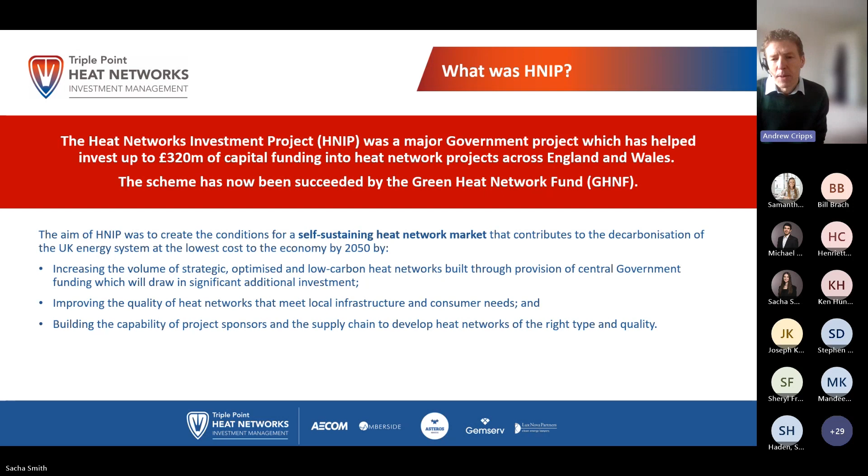This is a particularly important piece, because the rate at which we need the heat network sector to grow is significant if it's going to meet the aims we have in overall policy terms. So getting this growth in the quantity and quality of the people in the supply chain is really important, and I think we've done quite a lot in that respect, as well, as we're going to hear today.

It's quite an interesting thing that there's been a significant rate of change in the policy sector. In fact, the early aspirations were as much about growing heat networks of any type, but as the scheme has developed, it's been clear that we needed to decarbonize more quickly, and we've seen a move away from some of the early schemes that had greater use of gas CHP towards a lot more use of heat pumps.

And energy from waste. Notwithstanding that, we've invested something around 270 million in this set of heat networks, and those are contributing to a total investment of around 700 million, exceeding 700 million into those heat networks. So really quite a significant collection of projects which are coming forward of good scale.

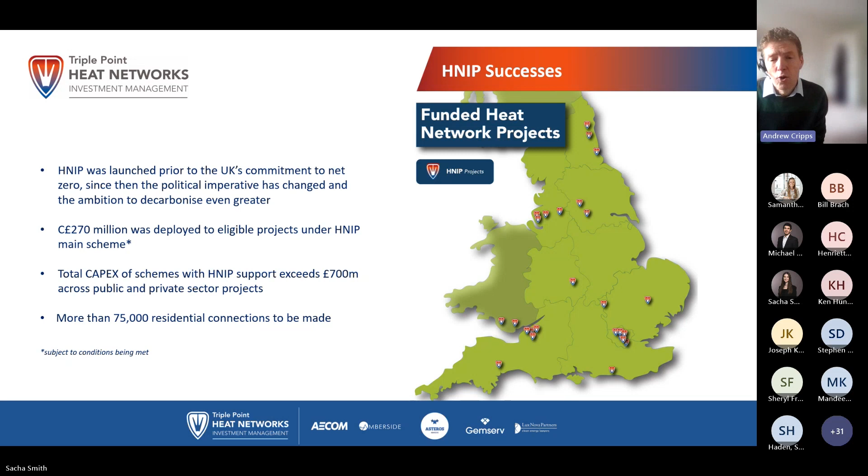Amongst other connections, that means that when this is built out, we could see as many as 75,000 residential customers being served by these heat networks. So that's the scale of what's been done already, or is being done already.

The first is Beehive. The purpose of Beehive is to be a place at which potential customers for heat networks can put forward their request for support, particularly local public sector customers can put forward their request, what it is that they want for support, and then potential funders or suppliers of a whole range of services can get together with them there.

So if you haven't come across that before, the acronym there was BEIS, because that was the department at the time, Business, Energy and Industrial Strategy, Heat Investment Vehicle. So the idea was to bring together, and still is, to bring together projects with investors to bring them forward most effectively. So if that's of interest, please investigate that. Easy to find on the internet.

The second and third ones here are both areas where it was felt, coming into the programme, that there's so much similarity between projects that it makes sense, as far as possible, if the documentation used in them can be made more common. We can save costs developing bespoke documentation for particular situations where other people will already have something similar.

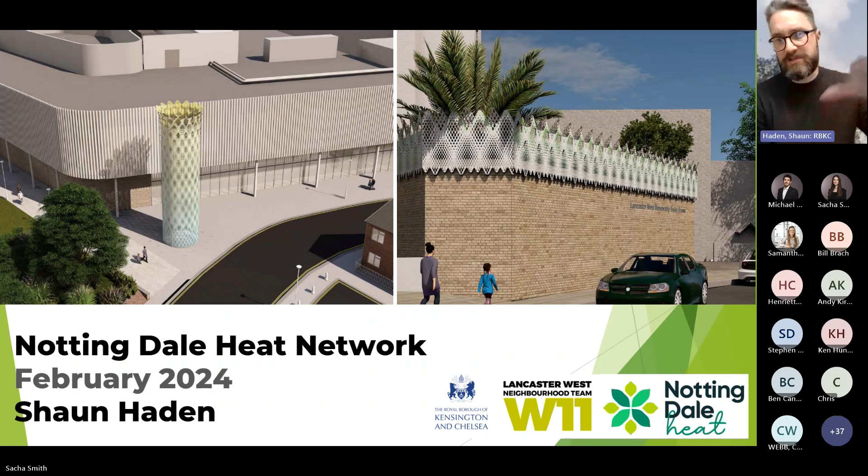So my name's Shaun Haden. I'm Head of Strategic Programmes and Innovation at Lancaster West, which is part of RBKC. Here today to talk to you about the Notting Dale Heat Network, which is a heat network on the Lancaster West estate, which is the estate which surrounds Grenfell Tower.

As you're probably aware, there's been a big focus on the Lancaster West estate and Grenfell Tower following the tragedy that happened a few years back. There's a big government commitment to turn the estate into a model for the 21st century. And our vision for the estate is fourfold.

We want to be that model for the 21st century housing estate. We want the estate to be carbon neutral by 2030. There's a big co-design and co-delivery aspect to everything that we do on the estate, and Lancaster West sits in the broader Notting Dale ward, which has achieved eco-neighbourhood status from the GLA. So we want to turn Notting Dale into the UK's largest eco-neighbourhood and put that green recovery at the heart of Grenfell recovery. So that's our vision.

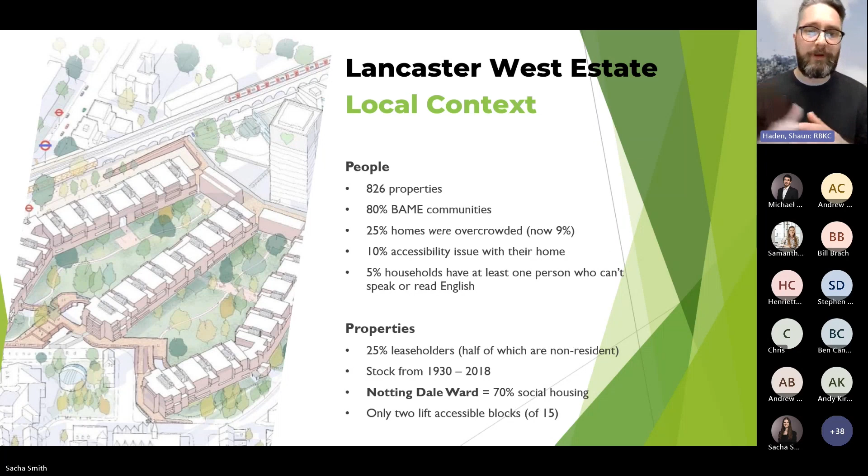Little bit about Lancaster West. It's a really small estate, 826 homes, hyper diverse, with a good range of tenures on the estate - leasehold and tenants. There's some commercial assets on the estate as well. There's a range of stock on the estate too, ranging from 1930s Victorian homes all the way up to modern 2018 new blocks.

As I said, there's a big government commitment to turn the estate into a model for 21st century estates, with a big programme of works taking place on the estate. The aim is to turn the estate into zero carbon, as I said. There's four aspects to our programme.

One is this concept of a deep retrofit, refurbishing all of the homes on the estate internally to a really modern standard. Landscaping and public realm is a big thing which has emerged, turning the landscape and the estate itself into somewhere which is pleasant to be around - turning it into a garden estate. And the other key aspect which we're talking about today is the Notting Dale Heat Network, which is a major plank of the programme.

So Notting Dale Heat Network is basically trying to turn two end-of-life gas communal heating systems into one single renewable heat network. We've got four key aims. One is to turn it into a reliable heat network. One is to deliver really excellent customer experience. One is to protect customers from rising energy prices and embed fuel poverty work within it. And the other is to support the council's ambition to be carbon neutral by 2030. So those are the four things we're trying to achieve via the Notting Dale Heat Network.

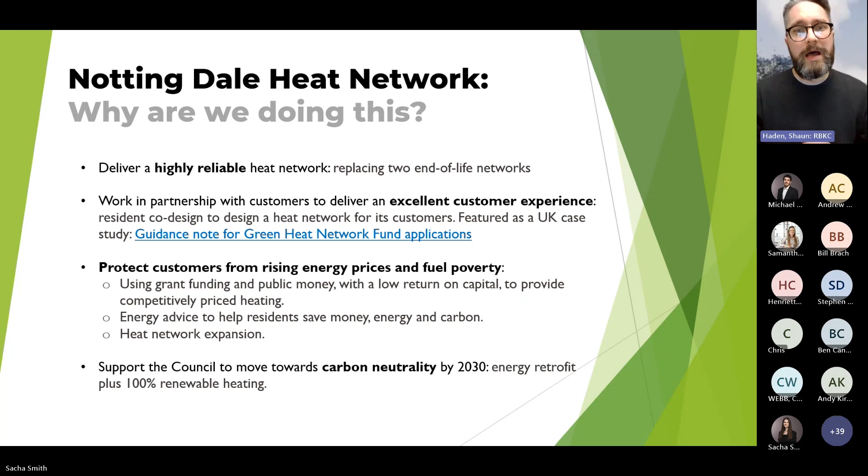As I mentioned, phase one of the heat network is on the Lancaster West estate, 826 homes. 75% of those are tenants, 25% are leaseholders. RBKC is the main freeholder, which makes this project really much easier to do, I would say. 80% of the estate are on communal heating - those two gas-fired communal heating systems.

One communal heating system is literally on the roadside - it was underneath the tower when the tragedy happened, and that's been moved to next to the roadside. So we've got a temporary kit which we are going to roll up into one heat network, and another end-of-life system as well. 20% of the estate are on individual gas combi boilers, so one of the challenges we're going to face is to bring those 20% into one communal heating system and try and sell that to customers.

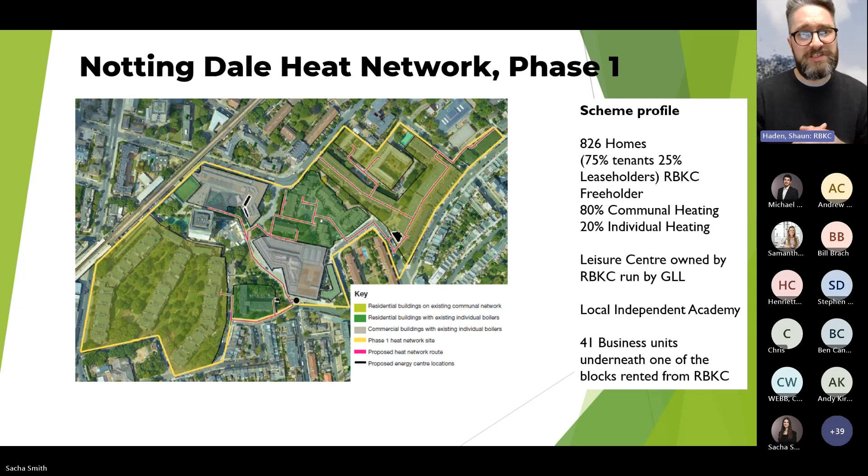The scheme also includes a leisure centre, which is owned by RBKC, and a local independent academy. There's also 41 business units as well, which are part of the scheme, which sit underneath one of the blocks. I've included this slide.

HNDU have been really supportive. The grant we received from them unlocked the support we needed to get the right kind of people involved in the project - an experienced project team, project management function, and experienced stakeholder engagement people who've done this kind of thing before, which is really key for us. We were a local housing team, housing professionals, so heat networks were really not our thing. Bringing on board a team of consultants to help us move the project forward at pace with the right knowledge has been really helpful, and HNDU and HNIP have enabled us to do that.

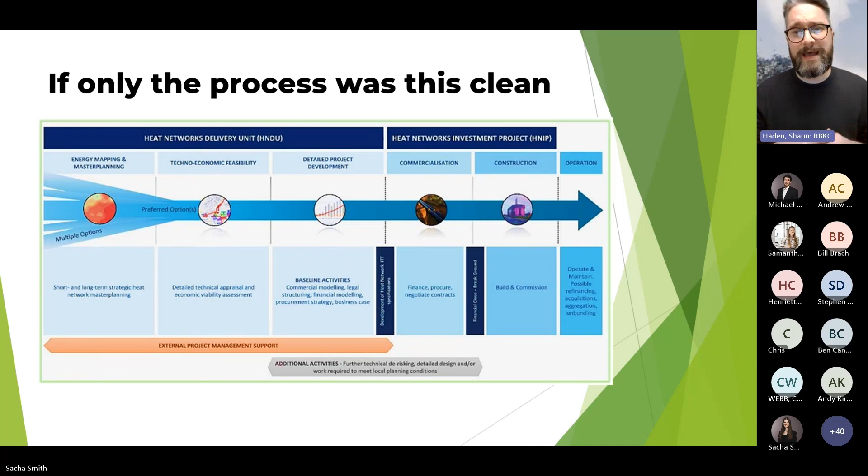Alongside that diagram around the programmatic aspect of moving the project from master planning to operation phase, we've run this co-design aspect throughout that process as well. As I mentioned earlier, co-design and co-delivery is really crucial and key to what we're doing on the estate here.

As you can imagine, there's a deficit of trust and a deficit of engagement with the council from local residents. So one of the key things we've been doing is working door to door with residents on a regular basis, talking to them about what they want this network to look like and what they want from the wider refurbishment of the estate. What you can see there is a timeline of that activity and some measurables from the work we've done.

This is really crucial for us, because where we are, consent is everything. If we don't get consent to act and deliver on the heat network, it's impossible for us to do anything on this estate. That's something really central to what we've done here at Lancaster West.

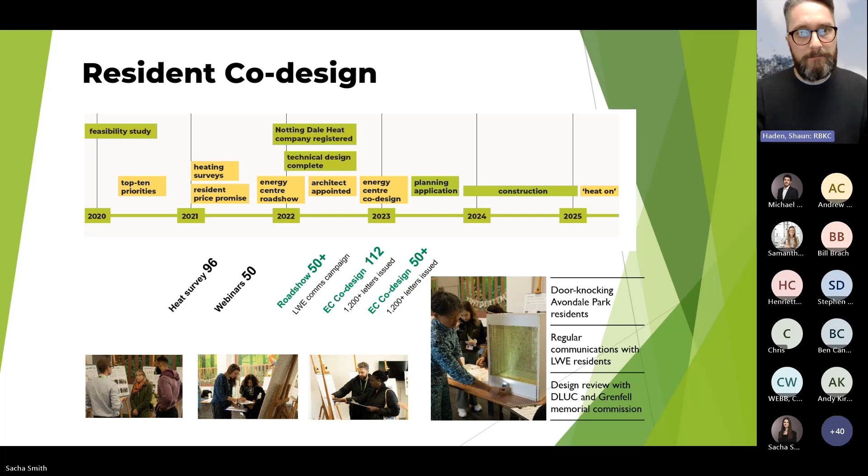Next slide, please. A little bit about the tech. I'm not a technical person, but I've become more and more understanding of the technical aspects as time has gone on. It's effectively run by air source heat pumps and a water source heat pump, situated on the roof of the leisure centre, which is going to be part of the scheme.

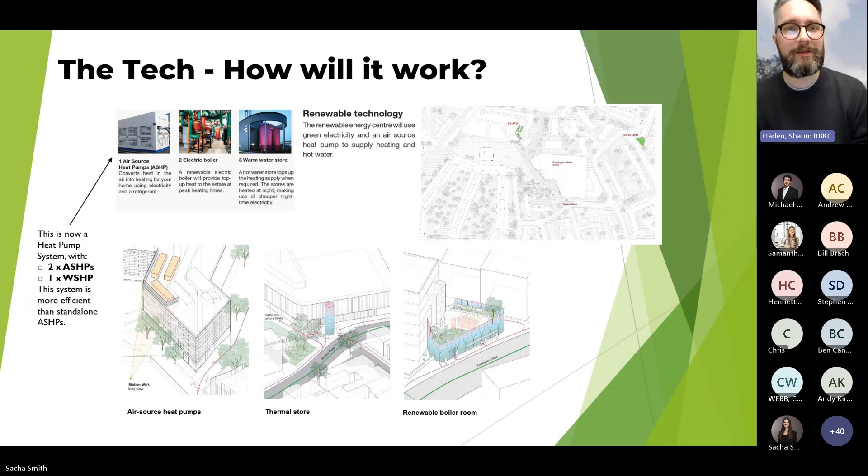We're looking at developing a thermal store, positioned, hopefully subject to planning, outside the leisure centre. There's also going to be a renewable boiler room, repurposing an existing boiler room that currently supports half of the estate. The aim is for it to be completely renewable technology, using green electric to power the kit.

Here's just some images of the energy tree, as we're calling it, subject to planning permission. This is the water store which is positioned at the moment outside the leisure centre.

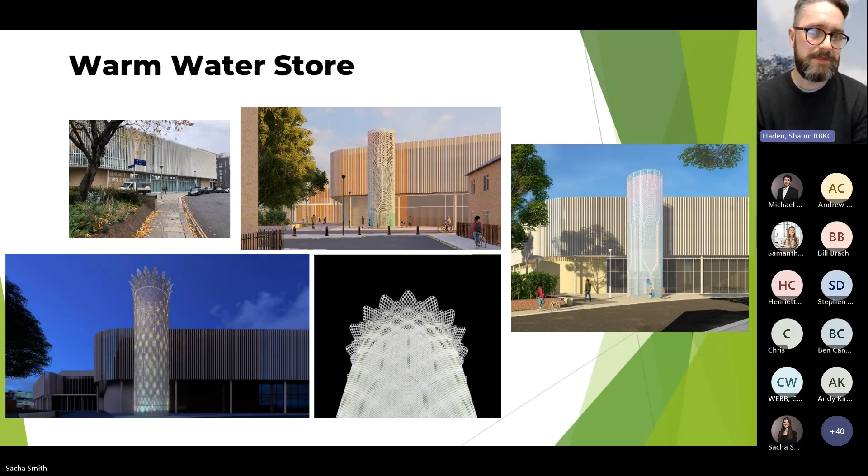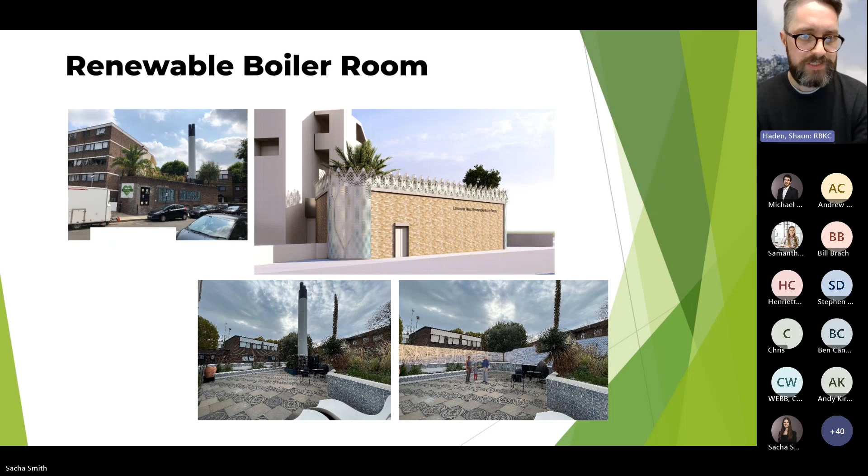As I said, subject to planning permission, which is going through at the moment. So some more images of potentially what the boiler room may look like. What you see there is a Moroccan garden in the bottom two images, and the removal of the stack which is currently there, supporting a gas-fired communal heating system.

We've recently signed contracts with two contractors, Vital Energy and Synergist. The scheme is divided into two really. We've got a DBOM contract, which is design, build, operate, and maintain the primary network, which runs around the estate. The second contract is the design and build of the secondary and tertiary networks inside the residential homes. We're just about to go on site. We've had contractors with us now for a couple of months, and we've signed those agreements, and we are literally breaking ground in the next couple of months.

One of the key features of the conditions of the HNIP grant we received was that we should set up a local energy company to run the network. We've done that. That's been a really interesting process to go through, not least in our own context. The entity is called Notting Dale Heat. It's 100% council owned, overseen by a shareholder committee. There's a board of 6: 2 residents, 2 independents, and 2 council officers. It will have its own independent professional management, and it's got its own business plan. At the moment that entity is in its early beginnings, but the aim is for it to operate and maintain the network.

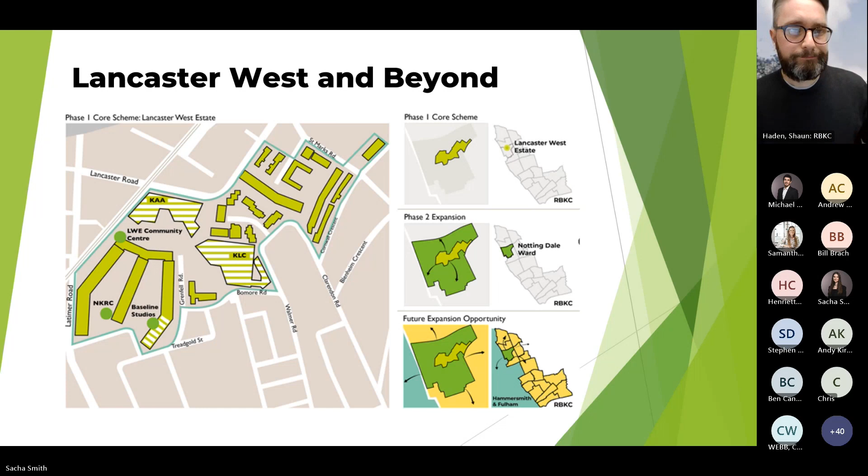As someone who's not a techie, I probably won't talk about technical success or challenges. Some of the things we've been really successful at is building a winning team. We've been in really good hands with the consultants we've employed, with HNDU support, and with HNIP as well. That's been useful for harnessing government grant, building momentum, and triangulating lessons learned - learning from others what's worked well in the wider sector, what hasn't, where others have failed or succeeded. We've tried to learn from those examples. The resident co-design, as I mentioned, has been really key throughout this project.

Navigation of the politics has been a success from my perspective, but also a very big challenge. One thing we've done is see these projects as more than just an infrastructure project - rather than just pipe work, it's about who are the customers at the end, who are the residents, who are the people that will actually use the system and pay the bills. Another thing is just questioning everything. I think we've got a team with a good balance of heat network experience, but also people like myself who don't come from that background, so challenging what we're being told and what's been accepted - that's really helped us.

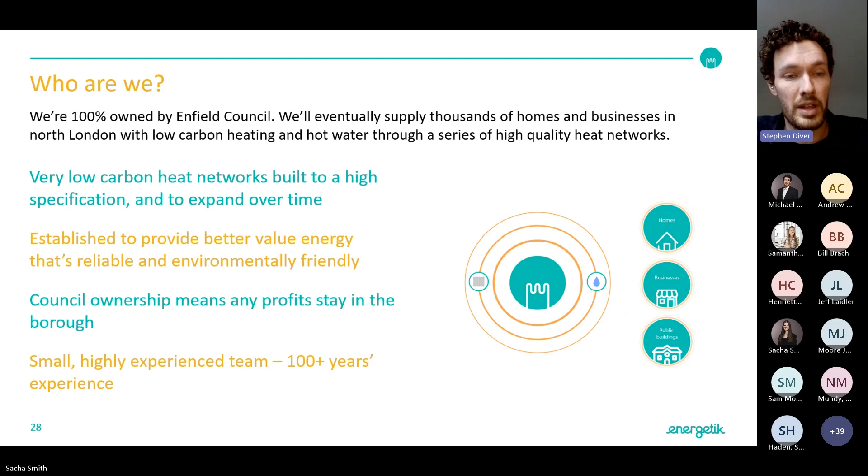So, as I mentioned, we're fully owned by Enfield Council, but we operate in a private limited company capacity with a series of executive and non-executive directors on our board from industry. We put our customer in the middle, and Energetik is in the middle of the delivery of that service. All the major contracts come into us: our design and build contract, our heat offtake agreement with the Waste Authority, customer services, etc. We make direct agreements with developers for connection and supply.

But Enfield is our main funder, so they are the borrower for HNIP in this case, and they on-lend to us. Subsidy control, state aid compliance considered, of course.

When we started this business, it was a very different market 10 years ago. But we very much thought, you've got one bite of the cherry, so everything was designed with expansion and big carbon savings in mind, with a view that heat networks were going to grow into something quite significant in the future as a way of decarbonising. So we made sure that all our energy centres have got plenty of extra capacity, and our pipework was oversized to make sure we could supply and connect to buildings in the future. Obviously, with zoning coming down the line, that's quite pertinent.

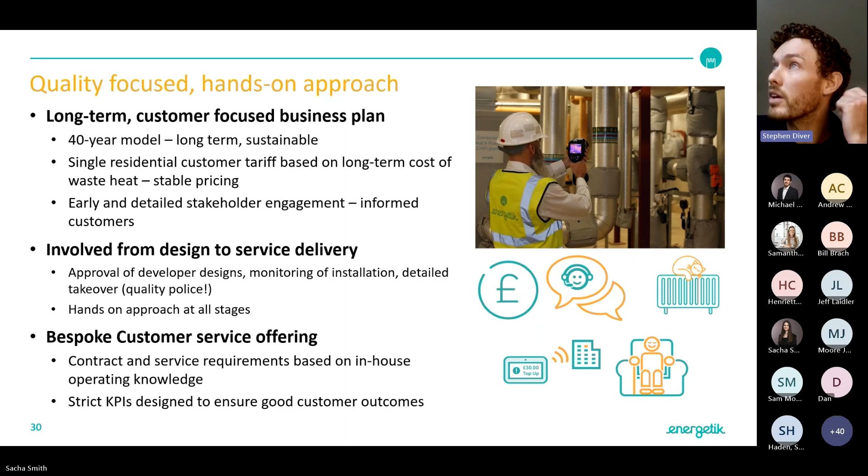So here's a brief timeline. Things take a long time. We were incorporated in 2015. Took 2 years of going back and forth, due diligence, green book, various things, but we got initial investment in 2017 to unlock the first part of the business plan, with HNIP funding coming in 2019 to unlock the rest. So we got started in 2017.

The rest was to build out our strategic scale network. And then in 2021, we got further funding for another 49 million to embark upon a fairly ambitious expansion project to connect a series of other development opportunities.

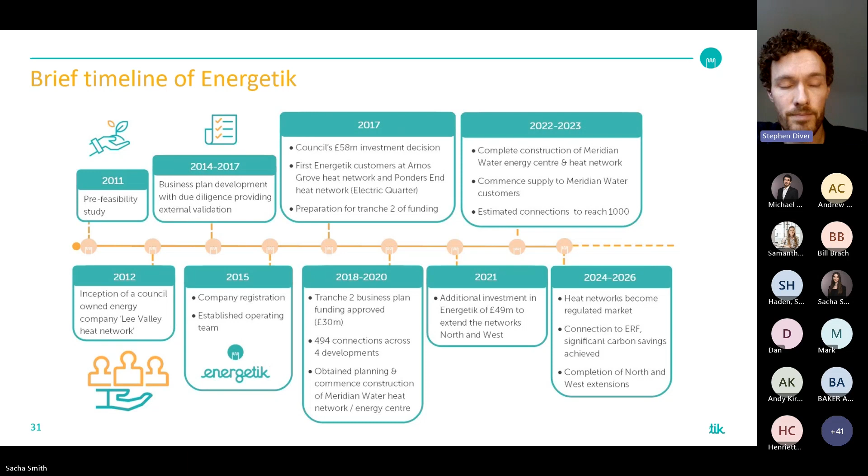So this is a bit of a brief map of Enfield. We've got 4 networks, although there's 5 pins on this map, serving 5 developments. All are operational. Meridian Water in the southeastern corner is the strategic scale network, and we've got varying from a couple of hundred to about 1,000 customers in total. But these networks are designed to build and expand as developments are built out, so we can supply potentially 60 to 100,000 customers eventually with what we're putting in at the moment.

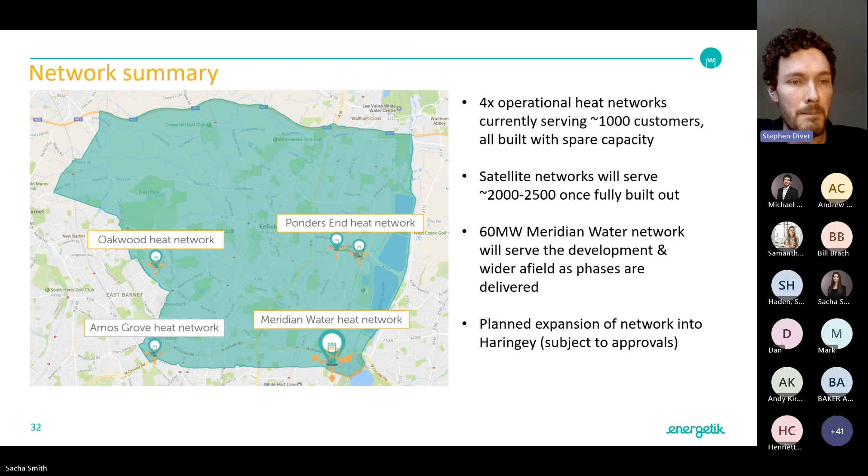So HNIP funding, as I mentioned, was one of the keys to unlocking our business plan. We've received, I calculated, probably about 15% of the HNIP pot that was distributed. But it's a massive network, so we had a massive amount of funding from HNIP, which, in terms of key wins, this project wouldn't have been as big and as aspirational if it wasn't for HNIP. That unlocked us to build our energy centre and install the first kind of 6 kilometres of pipework for phase 1, as well as doing some small scale extensions to our satellite networks.

Just onto the next slide, please, and I'll show you what we've built. So this is the Meridian Water Energy Centre. This is the strategic scale network that Andrew was talking about at the beginning, with massive capacity of thermal storage. For those techies out there, there's about 1,400 cubic meters in there, enough to take a massive amount of waste heat from the North London Waste Authority and use it as our batteries to then pipe out to networks.

Now, I say up to 100,000 homes in terms of who can be connected. My technical director comes up with a different number each time, but the number is essentially limitless. Obviously, you can provide base load or peak load, so we're putting in pipes that can carry kind of 30,000 customers worth of heat per leg at peak demand. So pretty high capacity network. The first homes at Meridian Water, all 20 of them, came online in September 23, but that will be built out to kind of build up to about 10,000 homes over time. But as I say, we've got massive capacity in the network.

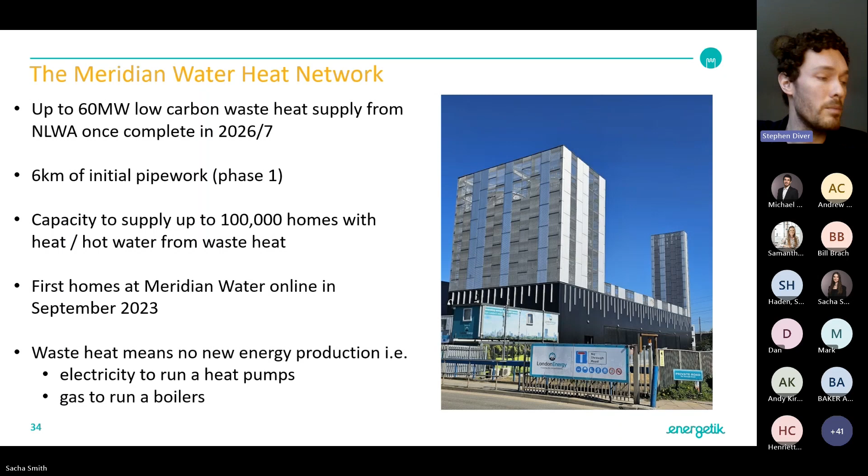So next slide, please. We then applied again in kind of 2020, 2021, where a series of large-scale developments came forward through planning, and it essentially provided the catalyst for us to apply to Enfield for more funding, which in turn we went to HNIP with the council and supported them to secure further funding to do this work. And that was essentially extension pipe work, extending across the borough basically to interconnect networks and lay the foundations for future decarbonisation of Enfield.

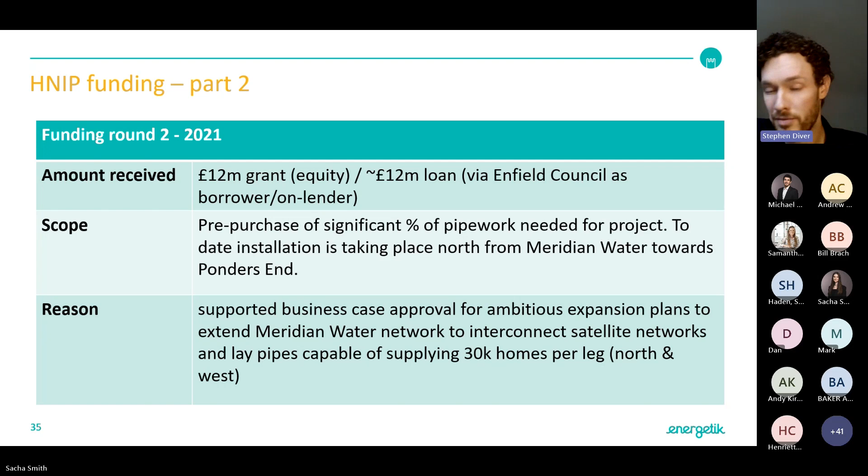That looks like the map on the next slide. Here's a slightly ugly map of Enfield, but you've got the Meridian Water Energy Centre and the Meridian Water development in the southeast corner. We're currently building all that blue pipe work at Meridian Water, as is the network at the Energy Centre. We're extending up towards Edmonton Green, that cyan line, and separately at the same time up towards Ponders End Heat Network, which should be completed at some point this year.

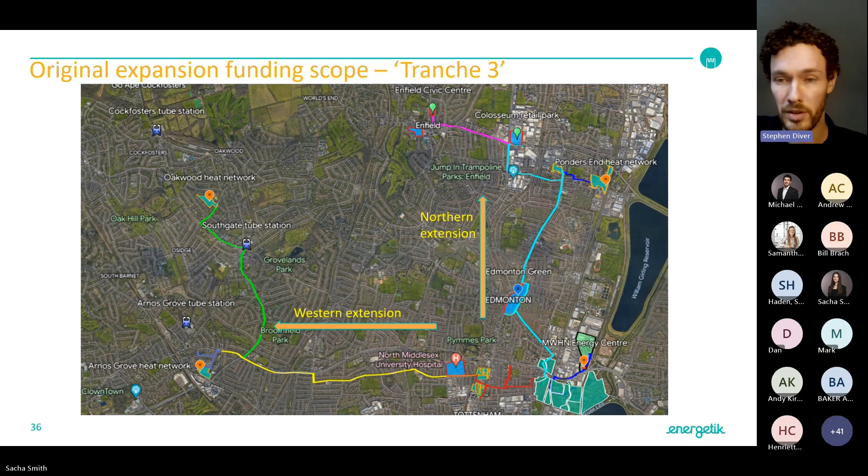It's not easy to dig through very busy North London roads, so one of the lessons learned is lots and lots of stakeholder engagement along the routes. Things go wrong, pipes burst, electrics get shot, not by us always, but being very engaged with transport and highways and making sure that everyone's fully briefed on what's going on is really important. And then the western extension was to connect to our other heat network satellite schemes and pick up a number of different opportunities along the way.

Now, getting to the important part of the presentation, we've had unprecedented issues over the last number of years, which everybody's been exposed to, inflation being one of them. Our project was originally going to be 49 million, as I mentioned, and we were kind of pre-purchasing a lot of stuff.

A key win there was we bought about 90% of the pipe for this extension project. There was a 30% cost increase the day after, so that was a massive win. But a 49 million pound project with 2 years of gross inflation and massive labour and materials increases has made that project, as previously shown, a 76 million pound project, which is untenable really.

Just to give you an example, £3,500–4,000 per metre of trench dug to deliver these pipes, and we're talking about metre and a half trenches, has gone from £3,500–4,000 pounds to £6,500–7,000 pounds.

So we're truncating the network somewhat at this present moment, reprofiling some of the spend to bring it back within budget so we can still deliver, and potentially reprofile the funding to go in a different direction, potentially south down into Haringey. There's another HNIP fund approval that Haringey received to connect to Energetik, so aspirational to get beyond Enfield, and we've got massive amounts of heat in Enfield. We are working through that with HNIP at the moment.

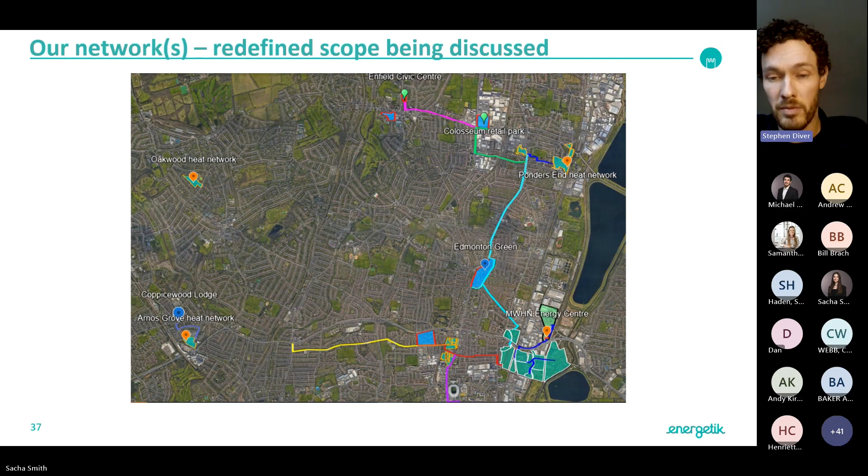Key wins and key successes: HNIP have been great and have supported us through it, and recognise that these issues happen in the market, and are helping us cut our cloth accordingly. HNIP has been a key success — we probably wouldn't be to the same scope and extent of a network without them. The lines on the page I previously showed probably wouldn't have happened without HNIP funding and the grants we received, meaning we could deliver a much bigger project to decarbonise Enfield.

One of the big successes was that we carved up the extension into different project lots to try and develop competition in the market. There aren't that many businesses with a balance sheet that can take on £50 million worth of project, so we carved it into smaller chunks, which brought new tenderers to market. Some have been better than others, but some are really, really good.

As I mentioned previously, procurement of all the materials was a bit of a boon. I'm sure I don't know what that price would have been if we'd been buying pipes as we went.

Just some of the lessons — working with HNIP has been great. Those guys are really supportive and have been there every step of the way for us, working with us. It's very difficult, we couldn't have forecast a global pandemic, wars in the east of Europe, etc.

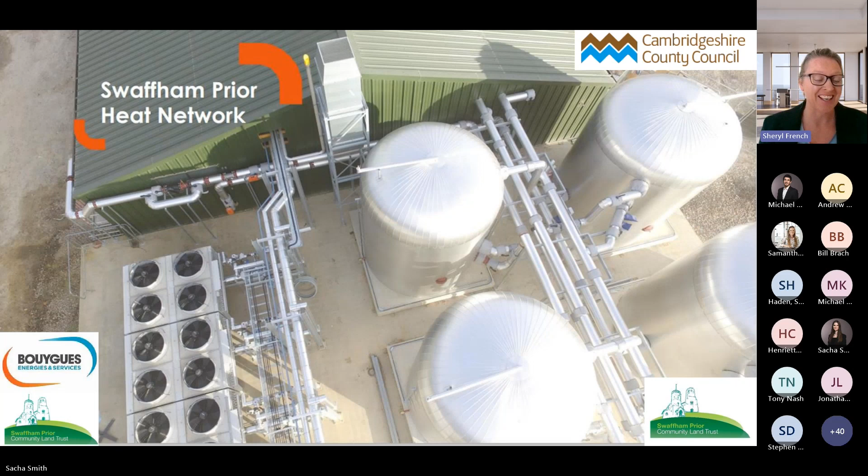This is a rural village. It's a mixture and combination of historic buildings, a high street of medieval times, and then a whole range of homes from manor houses down to very small social housing. So it covers everything. It's also on a slope, and the local people have large amounts of social capital.

They've done a lot of things in their village and they've achieved a lot. They've brought social housing into the village to support families staying there because house prices are so high. The positive thing is when they coalesce around an issue, they drive it very hard. Obviously, the other side is that when they're unhappy about something, they can also coalesce and challenge very hard as well.

So I'm just going to take you to the next slide. We had roughly 300 homes, 2 churches, a school, a pub in the village, and Cambridgeshire County Council has a large rural estate, with land just on the edge of the village. What the local people had identified was that there was a barn on the village edge which could be used if a community energy scheme was brought forward.

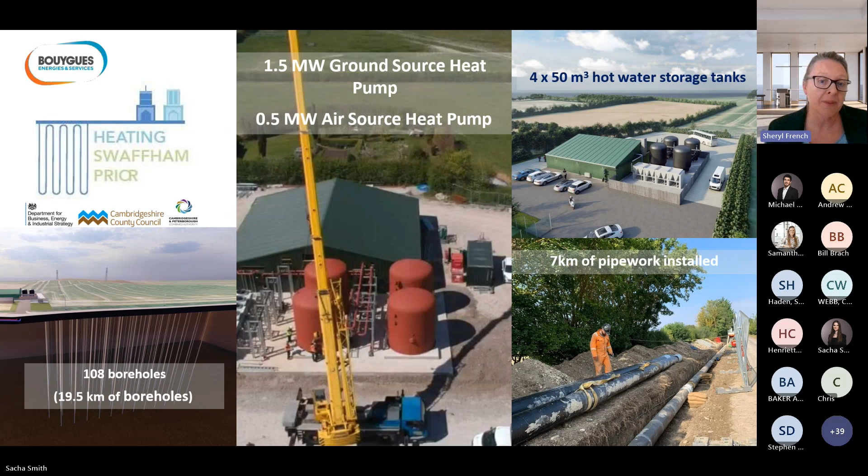So this was the proposal as an infographic. We had a ground source heat pump and an air source heat pump.

One of the reasons for changing initially from just a ground source heat pump scheme to one with a high temperature air source heat pump was two reasons. One, not to freeze the ground, because we were drilling 108 boreholes into it, but also to take the benefit of the shoulder periods and summer where air source heat pumps would actually be more beneficial and more efficient.

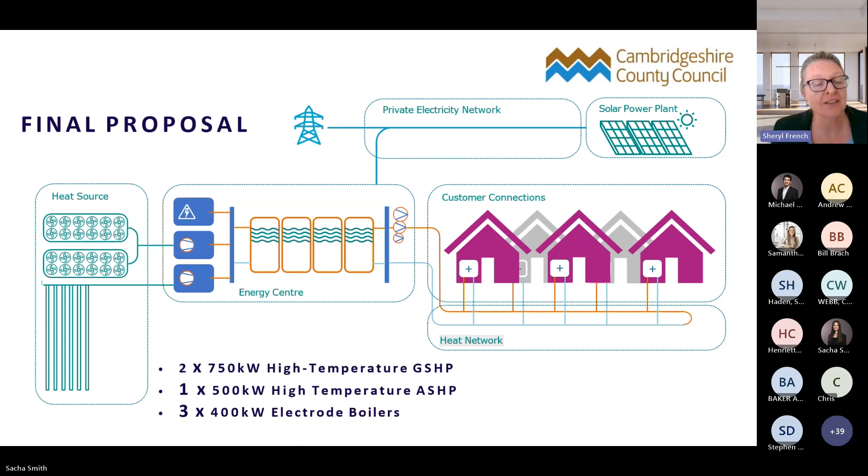So we've got air source and ground source, electrode boilers, feeding into an energy centre, feeding into a heat network, supplying customer homes. But also we have a solar farm that we were building at the same time, and we're constructing a private wire from our solar farm directly into the energy centre so we can fully decarbonise that system.

We have to realise the complexity of some of these energy centres we're bringing forward, and the specialisms required to support that. We've probably had more than 50 consultancies and companies working with Bouygues on the delivery of this project, some local, some further afield, who have the specialism.

One of the big challenges we faced, though it wouldn't happen now, was that as quite a small project, just about £8 million, we couldn't compete in the market for good prices on borehole rigs and drilling. Lots of the borehole drillers were working on HS2 and other big projects, so we had to negotiate any time they weren't needed, in between roles and in between jobs. This added cost to us that we hadn't foreseen at that time.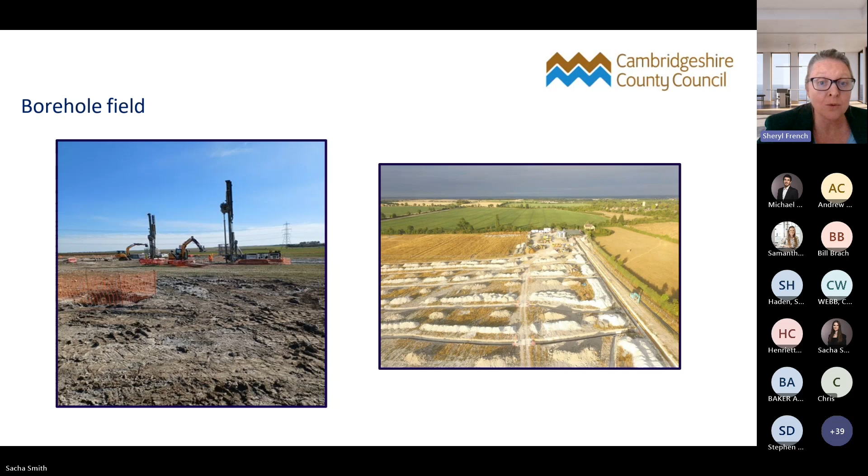So we've got the energy centre you saw, that's up and running. We've got the boreholes working, and we've got the heat network through the village. Those were all in a design and build contract.

What we hadn't done, and in retrospect this is something we'd do quite differently, is we had a separate contract for the home connections. The reason for that separate contract was that in a retrofit scenario, you can't get every householder to sign up ahead of something being constructed - they want to see that it works first. So we had no certainty around every home connecting quickly, and had to start the design and build, then connect homes at the end of the process.

Now inflation and all those horrible things that Sacha mentioned earlier then hit us. The costs of the connections - digging between our primary heat main, which you see on the left, and then into driveways and homes - and let's not forget, in villages you tend to have quite reasonably sized driveways, those costs have been much more significant than we had planned for.

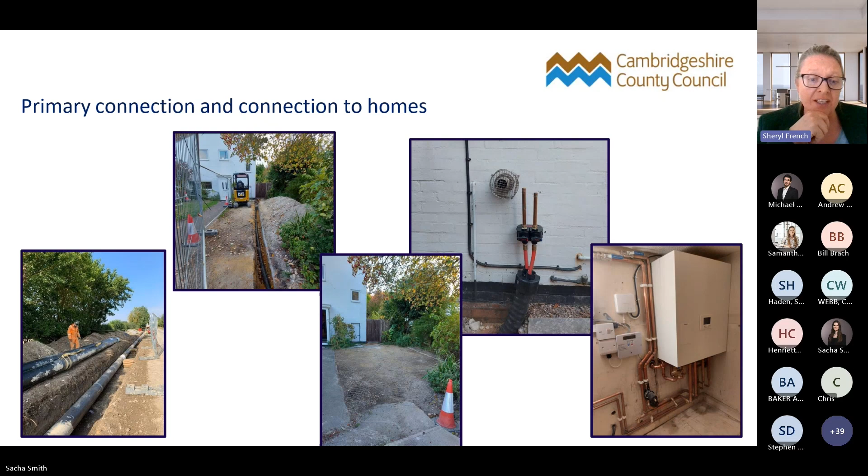These slides show you, on the right hand side, the heat interface unit. This is just some more slides showing homes that have had the connections put into them.

So where are we in terms of overall project? We're cutting carbon - we've decarbonised heating and hot water.

When we've got further connections, the ambition is 1,100 tonnes saved annually. We're not at that yet. And obviously we've also reduced a lot of oil deliveries and taken out oil tanks so that people can't go back to oil.

The cost we're currently charging, if people are interested, our charge on heat is 9.22 pence a kilowatt hour at the moment, plus VAT, and we peg it to DESNZ's indices on, I think, solid fuels, and we change that charge annually. So it will go up and down, and we aim to secure a 5% below the oil price for the first 5 years.

Then moving to being pegged to the electricity price by year 10 of the project. The big thing that we wanted to do, and what our members wanted to do, is that upfront cost was not a barrier to joining. So all residents could join without any upfront cost, and then the cost would be paid back over time on a long business case. The idea of this was to prevent those able to pay from decarbonising while those not able to pay continue with that cycle of higher costs on oil bills.

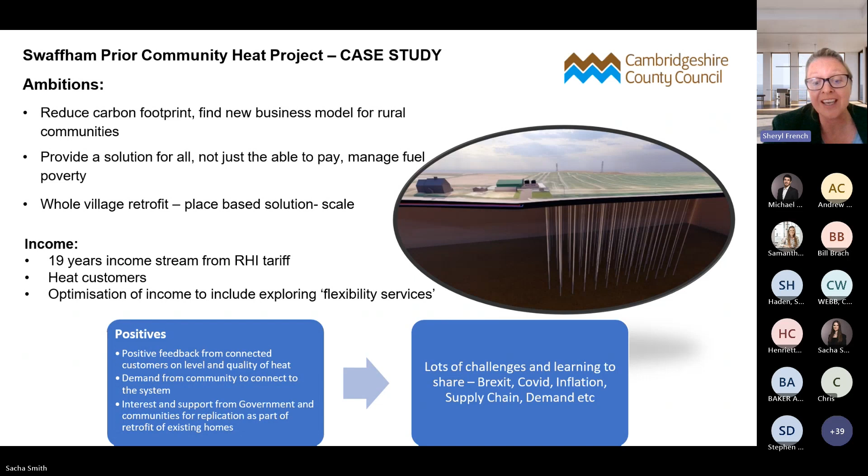Do we have any questions? Anyone want to raise their hand and ask any questions to any of our speakers? Or I've got one to kick us off. Any immediate burning questions?

Nope. So my first one, and I'd like each of you to take it in turn to answer if you could. Obviously the focus and key reason for undertaking a heat network project initially is reduced energy costs and carbon savings. But what other wider benefits have you realised in the local area? Any key social value learnings or benefits that people could take forward?

I don't know whether Sheryl, you want to go first, or I'm happy to go first if you want me to. So obviously we were moving off of oil, and so there's been local air quality benefits that people have noticed. We've taken out their tanks in their gardens, they've got more space. So that's just on a very simple level. I think on a wider level, we're connecting homes which have been electrically heated, and this is costing them less. And so there's that benefit. So during this affordability crisis, they might be warmer than they would have been otherwise. And that has the obviously knock-on benefits to health.